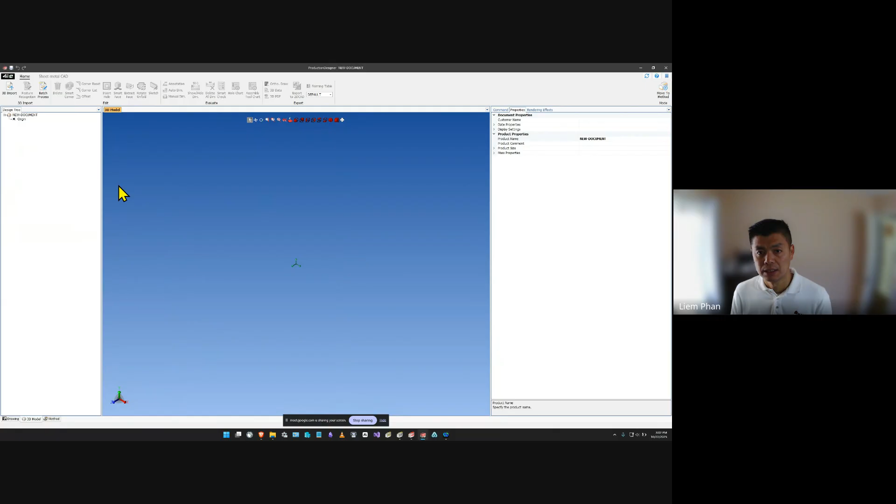I'm in Production Designer. I will go to Import 3D, select my file, and this is an assembly composed of four different parts, four different components. We can process it one by one, or we can let the software do what's called batch process, which we will assign the material to this assembly, and then we can convert it into a format that will be used throughout the software.

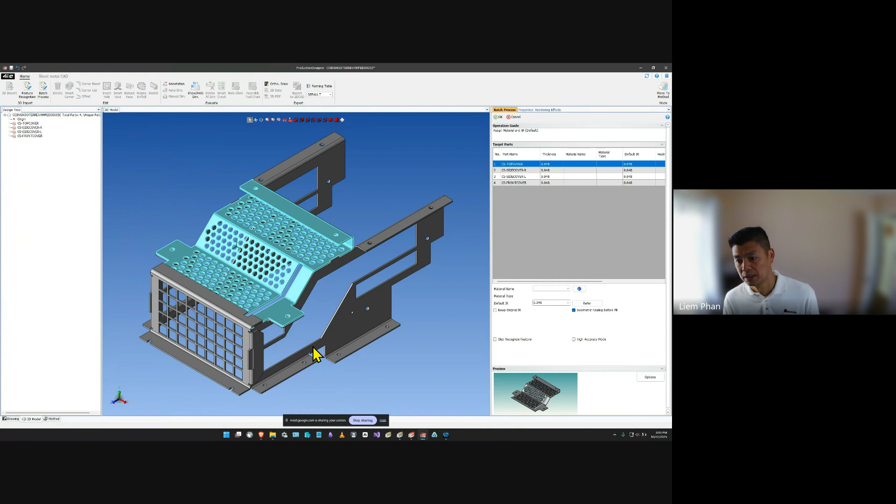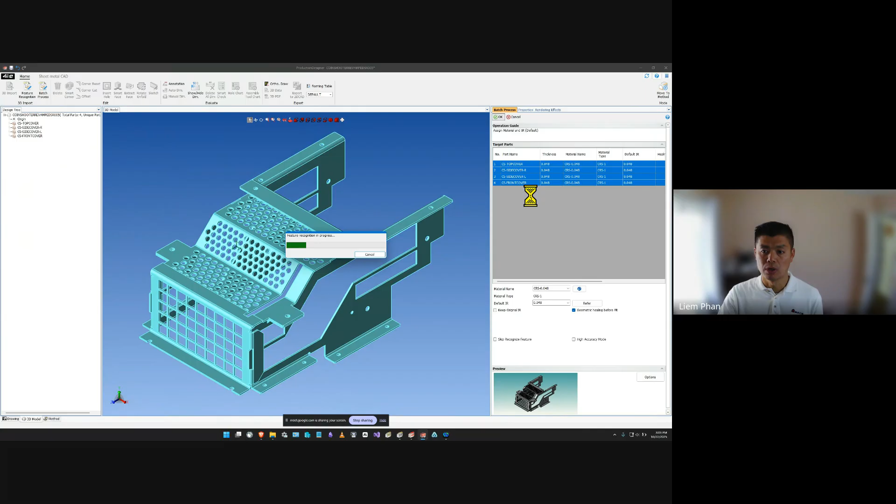So if we go to batch process, it will ask us for the type of material for each of these components. So we can, they're all the same material, so we can select them all, assign it CRS-0.048. And if we click OK, it will go through, process everything. It will unfold. It will recognize all the features. It will recognize all the bending information.

And then it will ask us if we want to save that. Save it to our database. So in the database, I have a folder that I can save to. Yes.

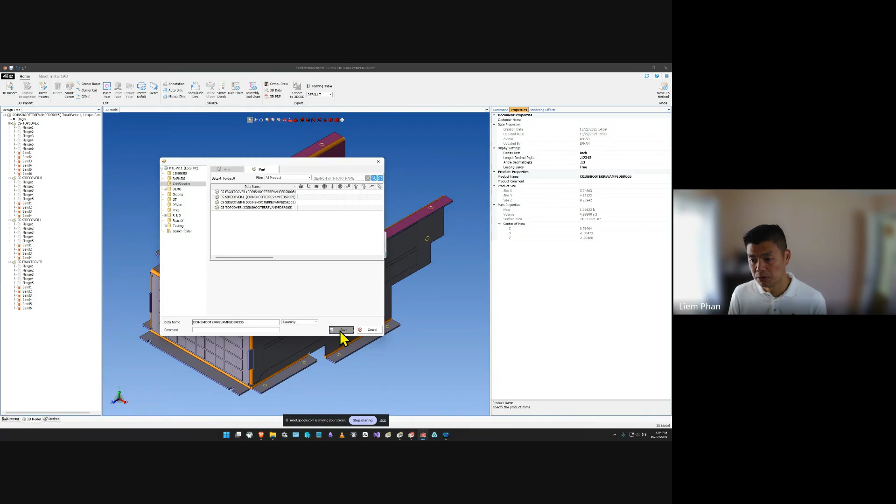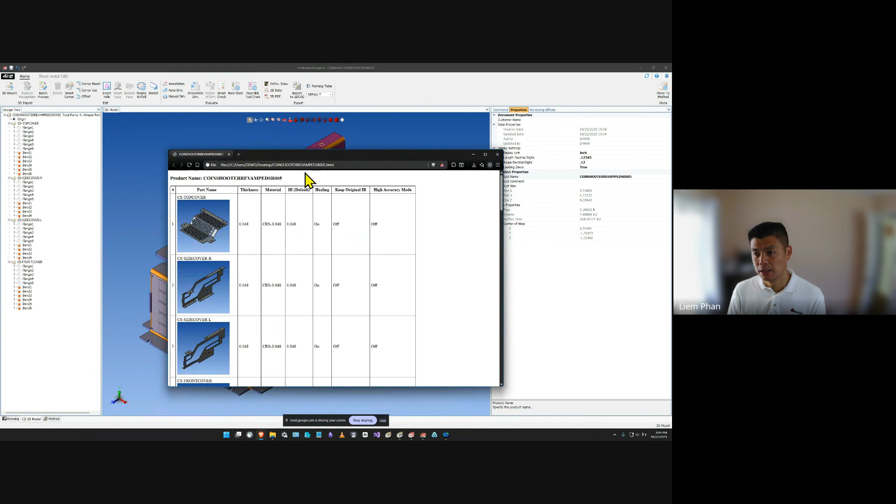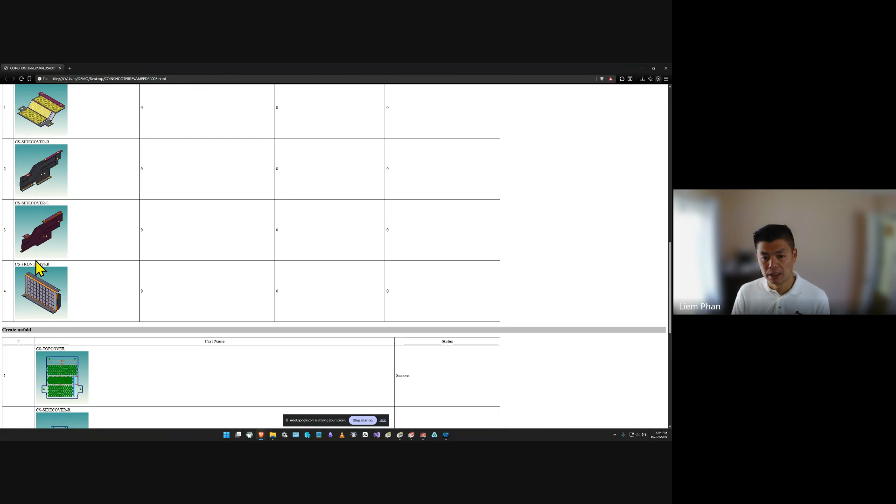So as you can see here, it went through and it generated this list here. It tells you that it broke it down into each component. It recognized all the features on each component. It created a method, and then it created the unfold, the flat for that. And it also saved the flat into a folder for us to use later.

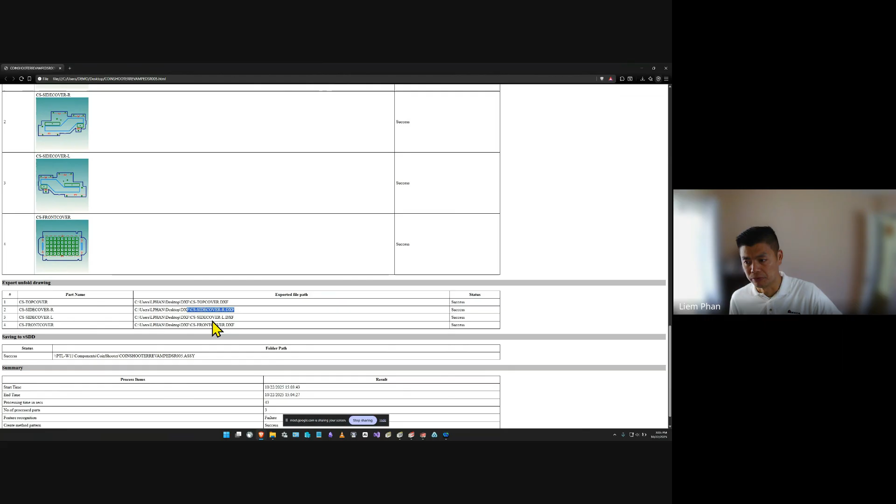If we work directly with 3D, we don't need this, but in case you have another machine or something that requires an unfold drawing of the parts, then this could be useful. So with that, it's already saved into our database. The next step is we hop over to this A Planner. A Planner is the auto programming module. It can do for blanking and bending, but in our case, we only deal with the punching side.

So I loaded that assembly into this list. This is called a schedule list. And from here, you can set the quantity. Remember, these four pieces are one assembly. So let's say I want to make two of each. I selected the machine. In this case, it's the AE. And then with that, I just let it auto nest. Select the sheet size to nest on.

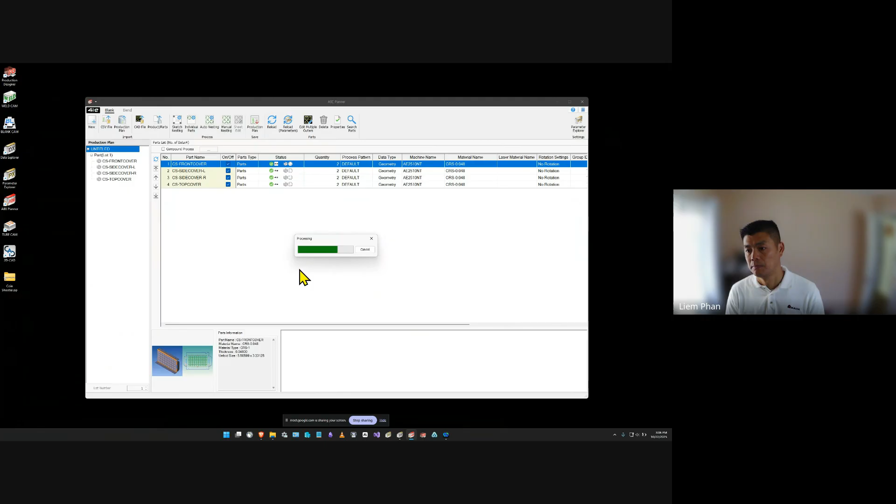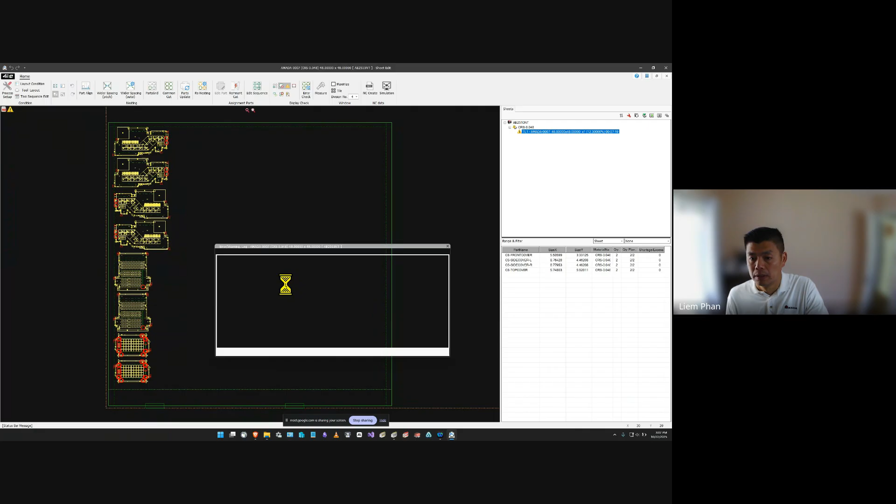This thing has a lot of holes, so it takes a bit of time to process. So what it does is it places your parts onto a sheet. Remember we did 2 of each. So this is your part. It assigns the tool to punch these features. That green line there is a bend line, so ignore that.

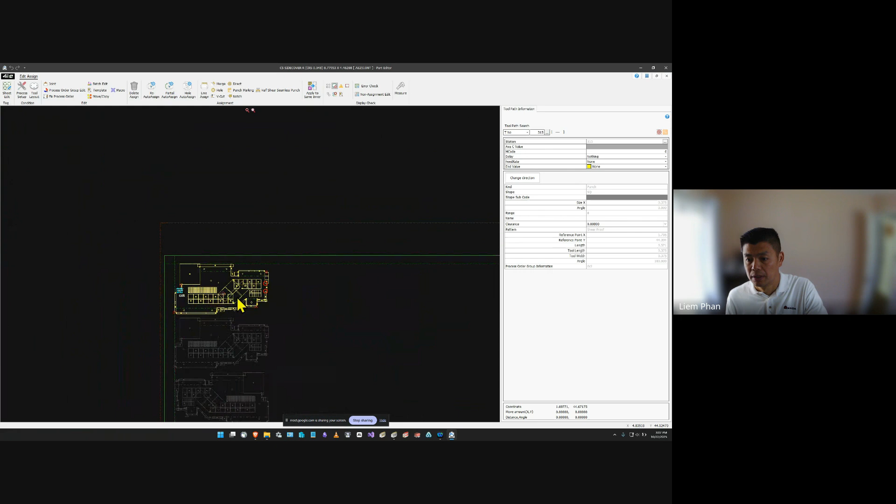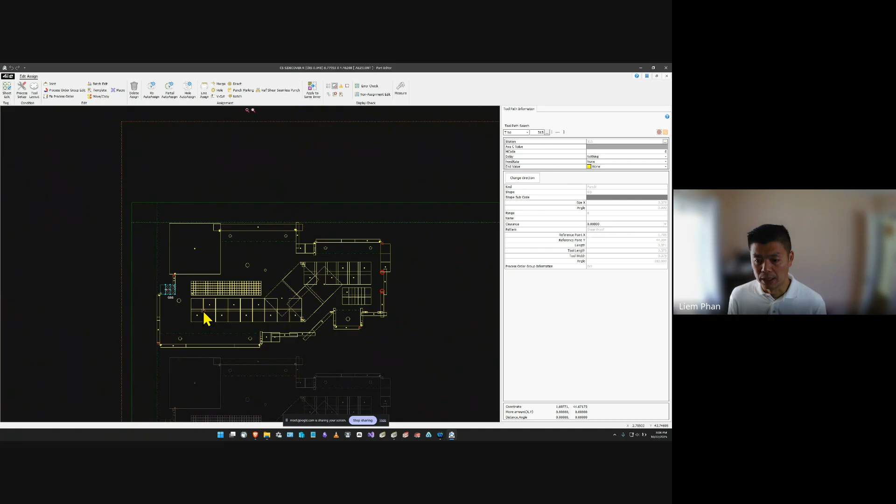But in here, you can also delete the assigned and assign your own tools. You can do things such as add joint. You can delete, you can edit the features, the tools. But this is more on the manual side. The auto software will automatically assign the best tool to do that feature. So for example, these holes, it automatically picked the tool.

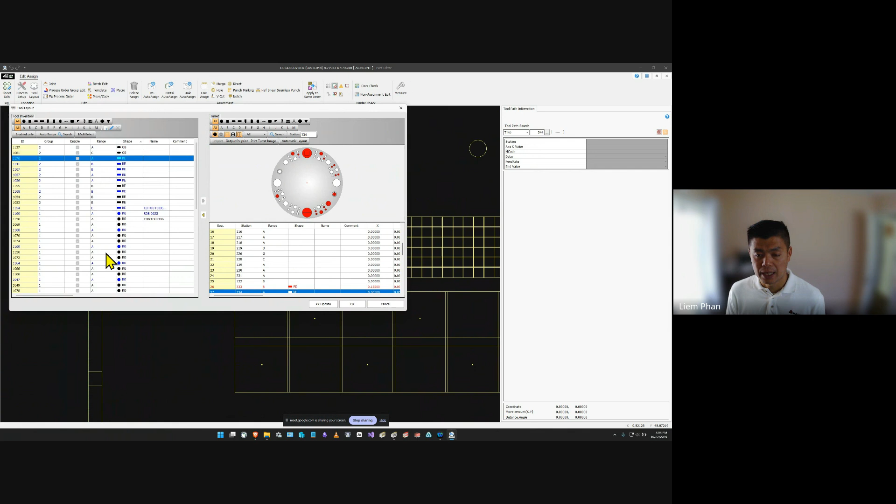So in here, the tool layout is the current tool that's loaded in the turret, and you can swap tools out. Say, let's say that station is open for like an A. I can add that in there. The left-hand side is your tool inventory. It's all the tools that you own. This is the turret. What you put in and put out of the turret, it's managed in here.

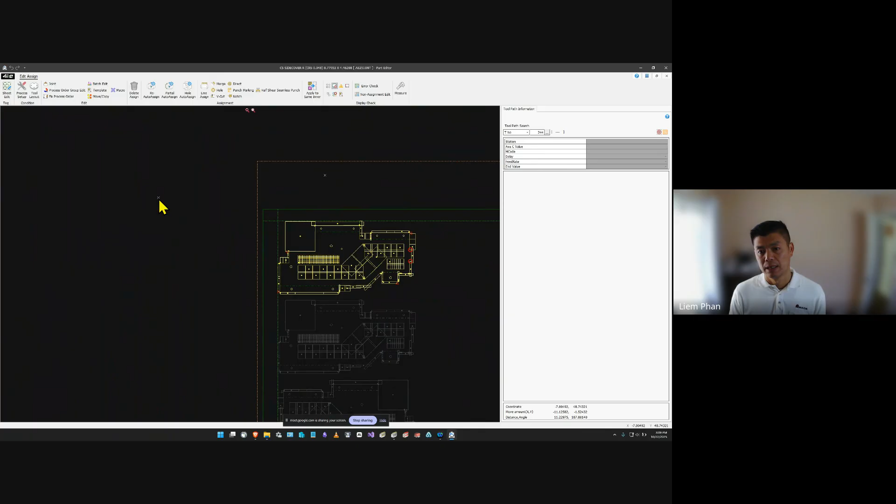But yeah, that's a quick rundown of how you take a part from 3D model, convert it into a format that the software understands, and then you only have to do that process once. After that, you just use this A Planner module to call up those processed parts and just auto nest, as you see here. This is what you should be using every day. You do have to configure the machine, the tooling, in another module called Parameter Explorer.

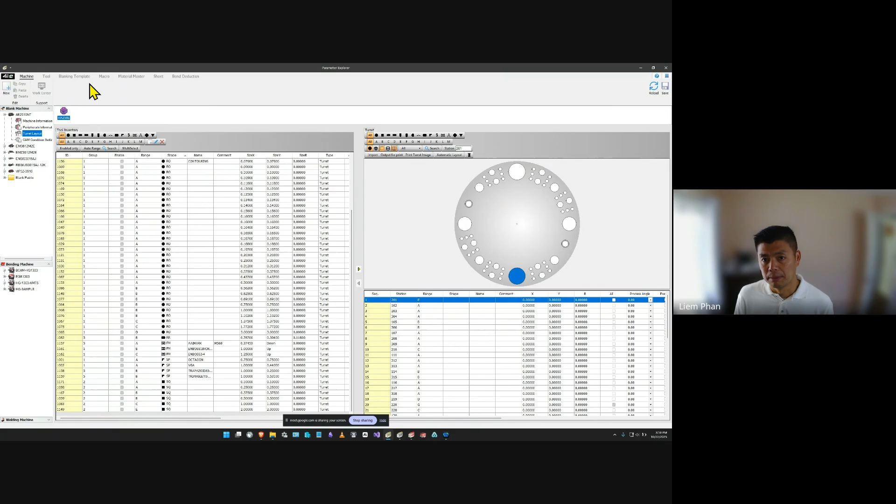And the setup in here, when you purchase the software package, you will get 3 training credits to take the classes at Amada School, and they will show you how to set up, how to manage tooling, how to manage your turret, add tool, delete tool, create sheets, all that. And then you also get support from our software support team for 1 year.

So if, after training, you run into something, you have questions, you can always call up our group, and they will remote into your computer and work with you on your screen.